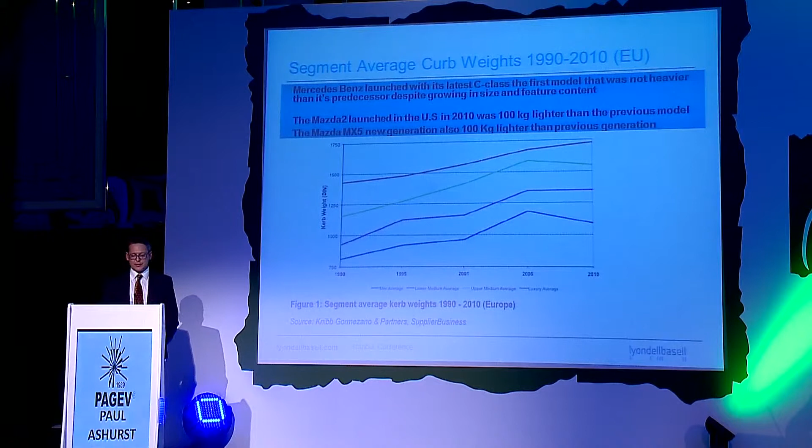So where does polypropylene fit into this mega trend of weight reduction? Well, polypropylene is one of the most versatile polymers. It's also one of the lightest polymers. So it's a very low density material. And that's why it's so popular.

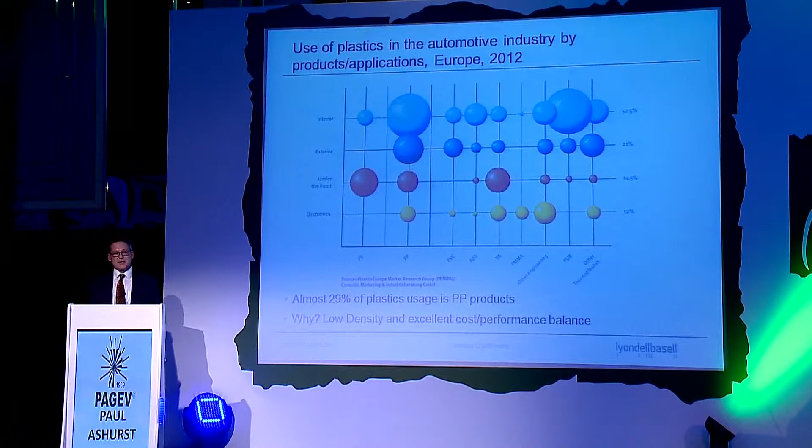If you look at this chart behind me showing the application areas of automotive, you can see that polypropylene is the dominant material in most application areas. It also has one of the best cost-performance balances. And cost, as you all know, is one of the most important physical factors.

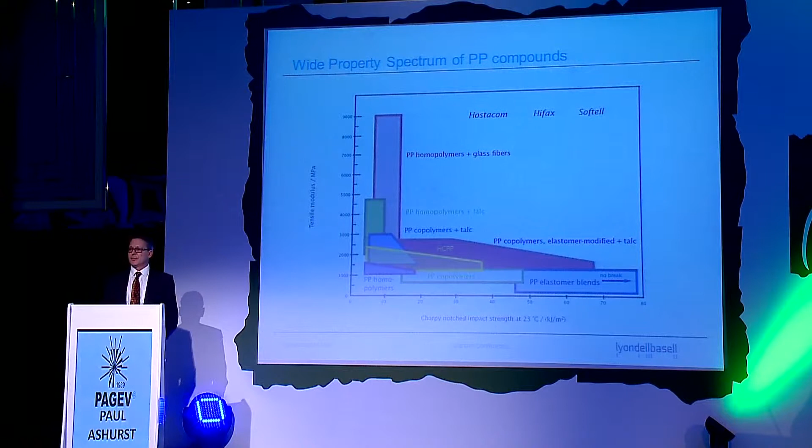And through compounding, adding talc and elastomers and reinforcing agents such as glass, we can really extend the property profile of polypropylene. From the elastomeric materials for car bumpers, by adding talc, we move into interior trim areas and instrument panel applications. And if you look to the left, by adding glass fiber to PP, whether it's 20, 30, or 40%, we can really increase the modulus to levels of over 9,000 megapascals. So now we're really starting to challenge and replace engineering thermoplastics and metals.

So what I'd like to do is really cover those trends we see across Europe in terms of weight reduction. It may be simple density reduction by reducing the filler level. The foaming of PP is really snowballing. We see a lot of new projects. Thin walling of parts continues. Structural applications, replacement of engineering thermoplastics, as I've said, and metals. Body panels is an area of growth. And we've got some nice examples of exterior metallics.

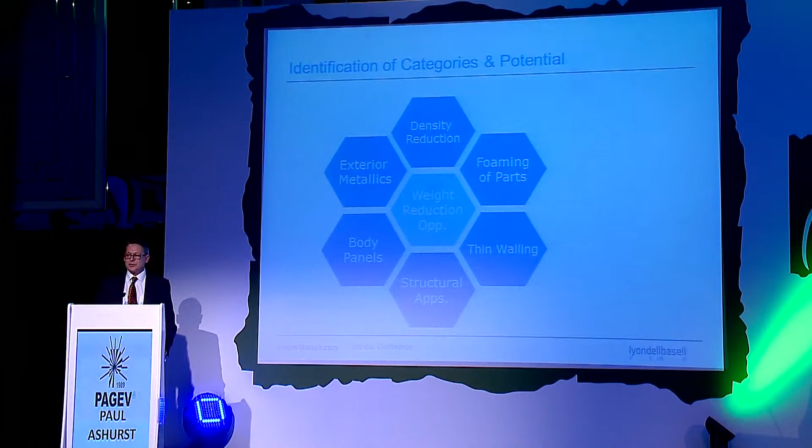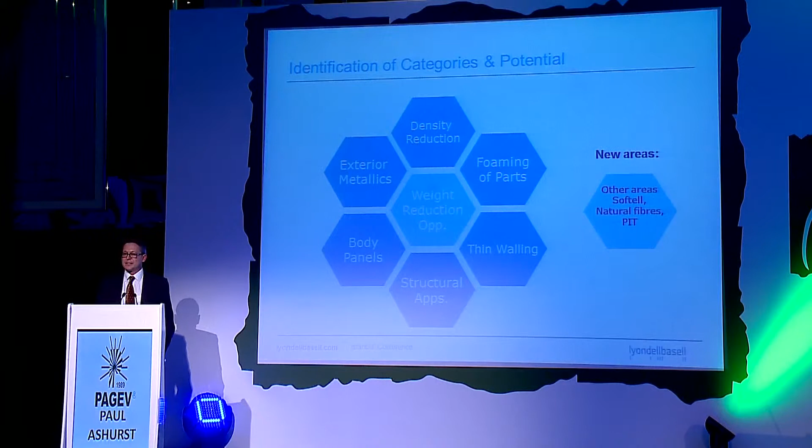We'll touch on some new areas, the progress of our Softell interior trim materials, green solutions to weight savings, which is natural fibers, and also our latest technology, which is plastics interface technology, which we call PIT.

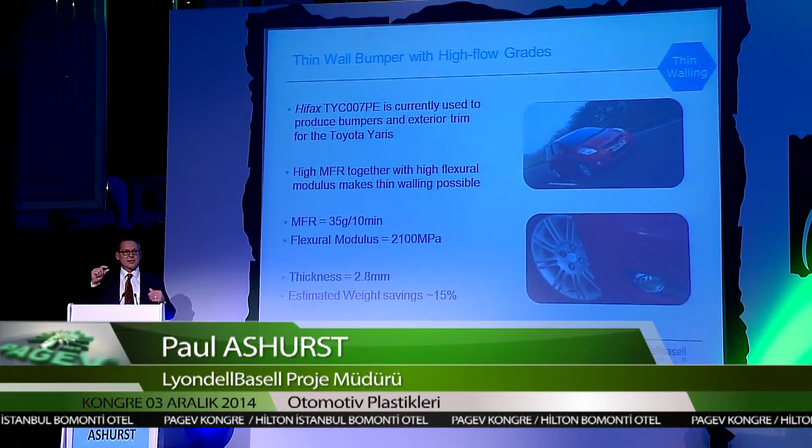Toyota, and indeed the Japanese OEMs, have been the pioneers in thin walling or down gauging. Of course, if you reduce the thickness of the part, you have to increase the flow of the material. And because the part is thinner, it means you have to increase the modulus of the material to achieve the same relative rigidity. We supply this material directly to Toyota France for the Yaris bumper. It offers weight savings of about 15% compared to conventional talc fill materials. We're also supplying this material extensively here in Turkey for the Toyota Verso and Corolla sedan exterior trim parts.

Density reduction. This is quite a simple idea, but we've been able to achieve this density reduction of 8%. This is an example of two VW materials. The first example is 20% talc reducing to 10% talc. And the second example is 16% talc reducing to 5% talc. Of course, with the talc reduction comes an improvement in the scratch performance, but also we've been able to achieve this as a drop-in solution. So it fits into the same tool with the same property profile. And we're able to do this by using higher quality talcs and also our own process technology polymer.

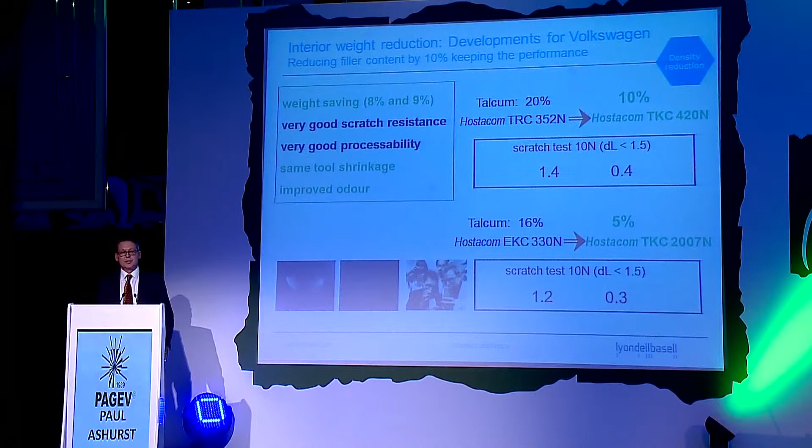And just look at the effect. By moving those two materials to the new materials, on the VW Polo, the weight saving is 2.7 kilos. And if you imagine multiplying that through many parts and many more cars, you can see that a simple density reduction through talc reduction can have a significant effect.

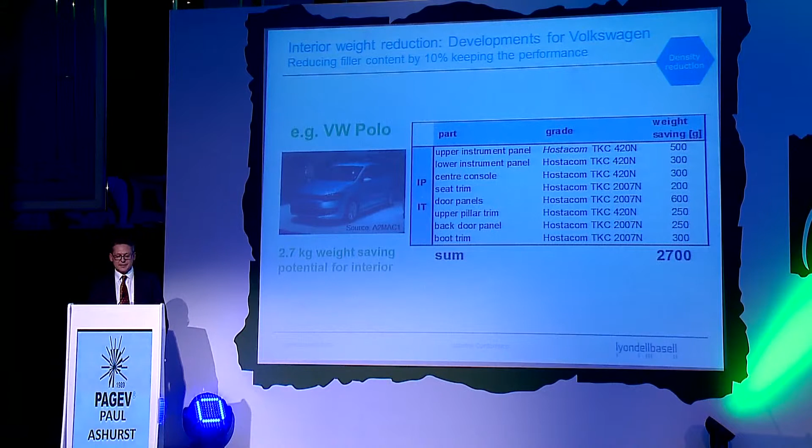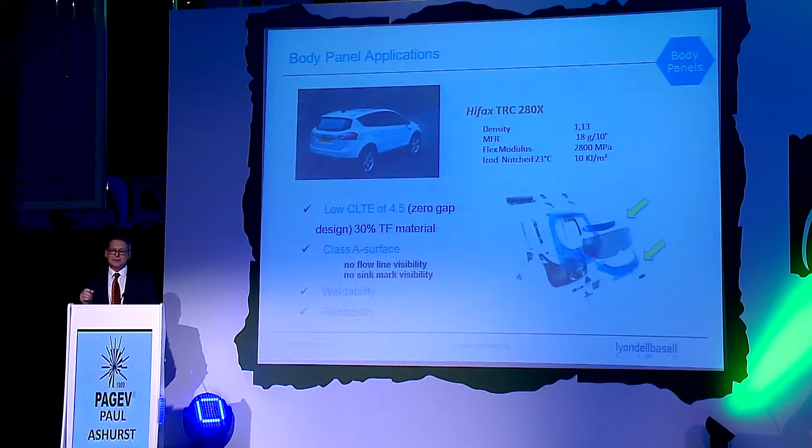Body panels is an area of growth, as we've seen already. We're supplying the material for the outer panel and also the roof spoiler. What are the requirements? Low CLTE, so we're talking about low shrink materials, and that's because these polypropylenes shrink quite a lot, but they're in contact with steel, so you don't want to create any gaps between them. So this is a 30% talc-filled material, so it's relatively low shrink. And these materials also have to have no flow lines visible and no sink marks visible, because most of these parts are painted, so you have to have a Class A surface finish.

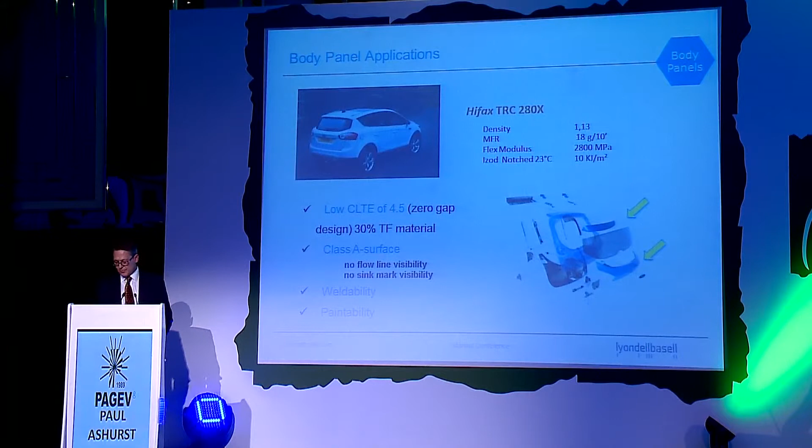This material is high rigidity, easy flow, and our CAE engineers based in Italy worked very closely with our customer to achieve a really superb surface finish. This is the Nissan Rogue in North America. It won the Society of Plastics Engineers Award for innovation. This is the same car as the Nissan Qashqai in Europe, and this is the tailgate outer panel. It's the first fully polypropylene liftgate using our material. So this is not concept, this is not future, this is happening now.

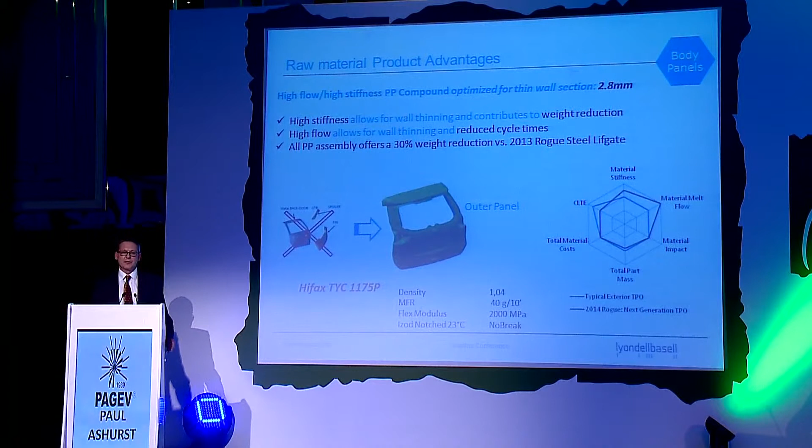And the material, as we've seen before, gives a 30% weight saving. This material, again, is really high flow for thin walling. So it's MFR of 40, and it's got a flexural modulus of 2000. And it's not just tailgates. This is an example of polypropylene, a low-shrink polypropylene with good rigidity and high flow for the Daimler Actros. And this is the whole of that front trim in polypropylene.

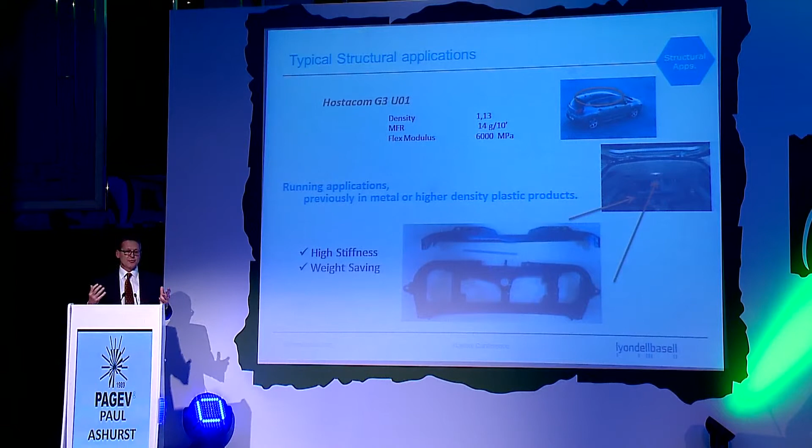This has been a trend you've seen of panoramic sunroofs, traditionally made of glass. What that does is it raises the center of gravity to a higher position, and you don't want that for car stability. So one of the ways to counter that is to use one of our glass-filled polypropylenes. And this is really replacing engineering thermoplastics and steel. So this part actually fits around the sunroof as a replacement for steel.

One of the major issues of polypropylene in the last 20 years has been trying to achieve very good scratch performance and very low gloss. Our range of Softell products is the answer to that problem. Developed recently, it's now replacing painted parts, particularly PC ABS. It doesn't matter if you choose a fine grain or geometric grain.

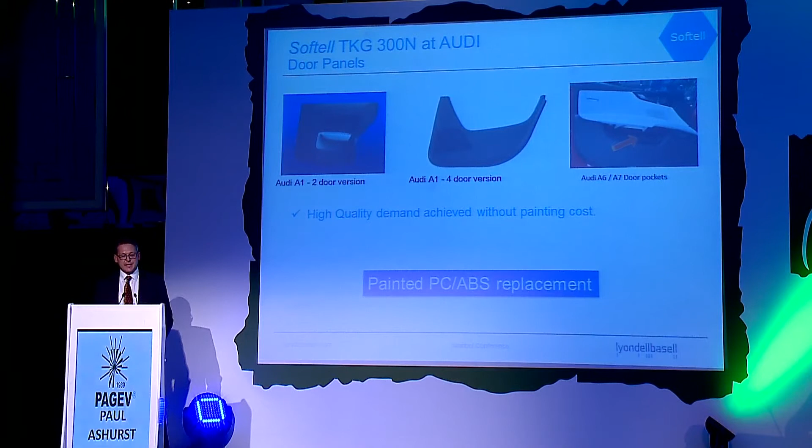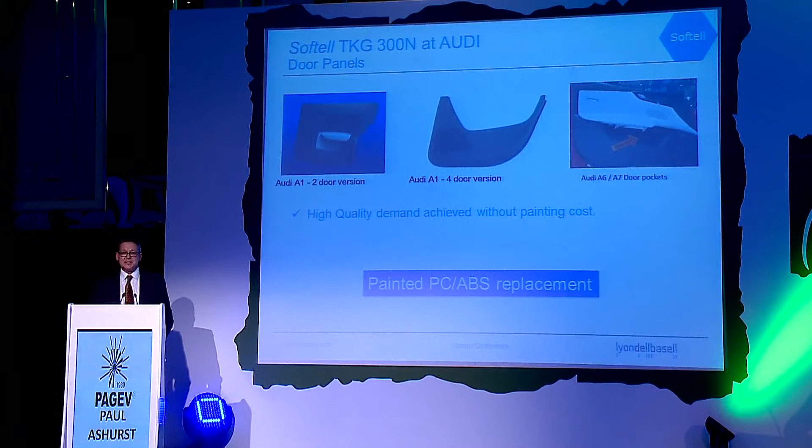We've also recently replaced on the Toyota Verso in Turkey the glove box door, which was painted PC ABS; we've replaced it with this Softell material. Again, it's a single-step material.

Just a couple more examples. PIT is our latest technology. It stands for Plastic Interface Technology, and it's a way of permanently bonding together two materials. And we actually license the technology, so it doesn't have to be a polypropylene. This example shows the engine cover for a Daimler E and S class. It's got a 0.2 millimeter aluminium foil, which is lacquered in a stainless steel finish, so it's replacing a steel type effect, so a big weight saving.

It's sent to a preformer where the foil is cut into shape. It has an adhesive on the underside, and it's sent to the injection molding company. In a magazine next to the molding machine, a robot picks up the foil, puts it into the cavity, where it's held by vacuum holes, and then the polymer is injected under high heat and pressure, and a physical and chemical bond is formed. Now, we're quite excited by this new technology. The black material will be 40% glass-filled PP, replacing nylon next year.

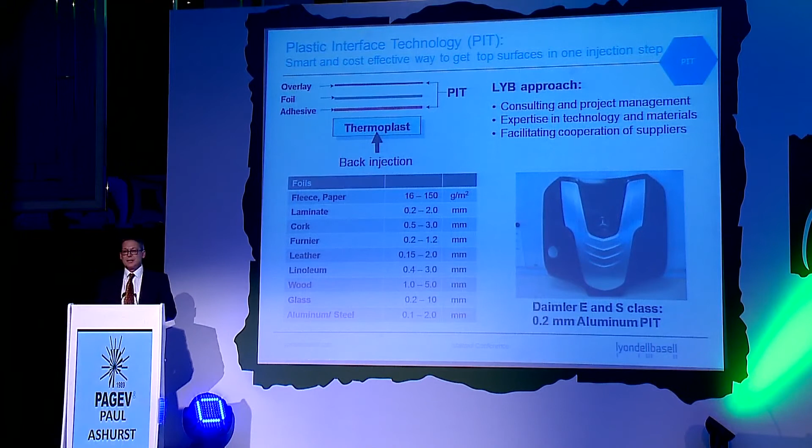But it's not just aluminium foils. There's a whole range of new foils we're looking at, and we have 21 patents pertaining to this new development.

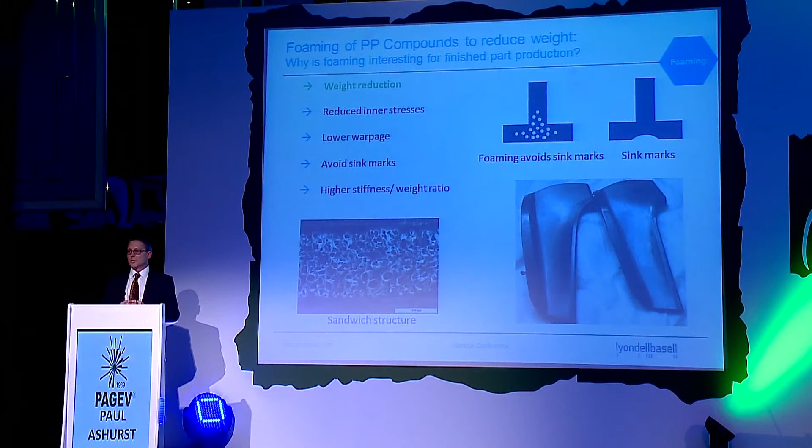One mention of foaming: we have developed a whole range of foamable materials in Frankfurt for interior trim with good aesthetics, low odor, and good scratch performance. And the only thing I want to add is that we have invested in a new breathing tool, which will be available from Q2 next year in our Frankfurt Development Center, where we can extend our knowledge and know-how with our customers.

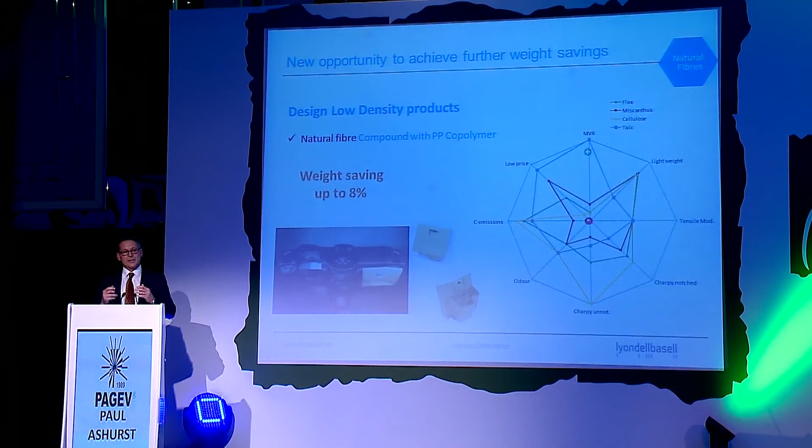And finally, we've evaluated many natural fibers for a green solution, and we found that cellulose is one of the better options. So we've actually had odor tests passed by VW. The properties themselves are similar to talc-filled products, and it represents a weight saving of 8%.

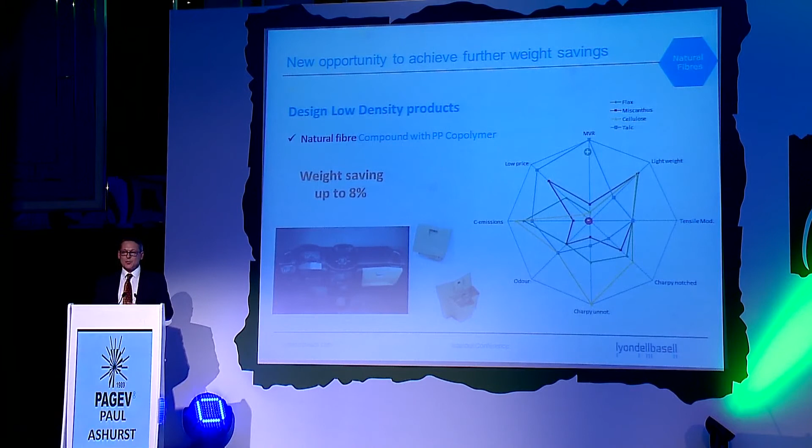That's a lot of information to cram into a 15-minute presentation. I thought it was 20, but hopefully you've seen from what we've shown, we have so many new ideas, current commercial ideas that we're selling today. And we'd like to not only challenge you, but invite you to join us in new projects. We'll be outside, obviously, later.

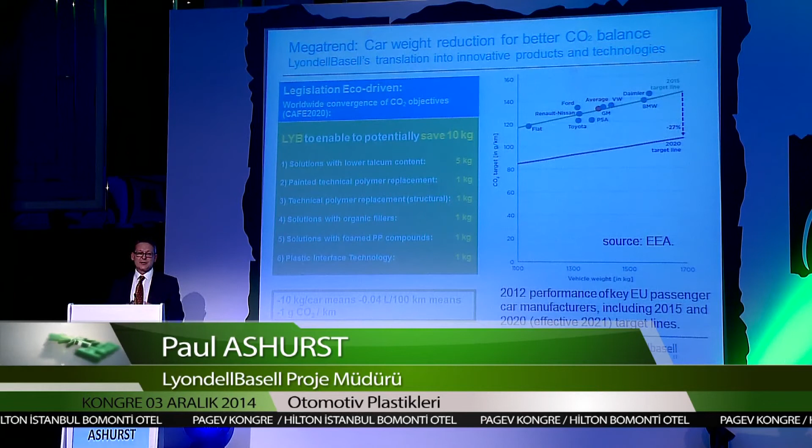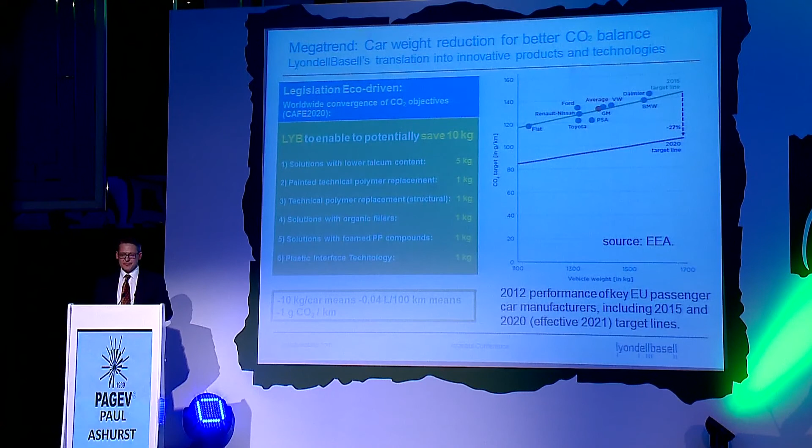I think most of you know LyondellBasell. And even looking at some of these ideas, we expect to save in the region of 10 kilos per car, which results in a -1 gram CO2. As you can see on the right-hand side, whilst all OEMs are expected to achieve the 2015 targets, the 2020 targets are going to be much more difficult to meet. And who knows thereafter, there's talk about 2025 targets being even lower, in the region of 60 to 70 in terms of CO2. So we've started a new initiative of Save 10, where we look to save 10 kilos.